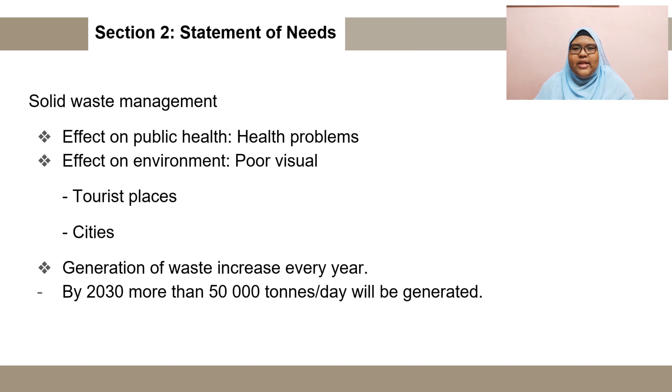The Shared Prosperity Vision 2030, National Solid Waste Management Policy 2016, 12th Malaysia Plan, Sustainable Development Agreement, and Solid Waste and Public Cleansing Management Regulation 2016 are developed and applied in Malaysia to reduce solid waste generation and improve waste management. Pahang State Structure Plan 2050 is applied in Pahang State to improve the State Structure Plan 2007, which is to upgrade the waste management sites with modern treatment and recycling facilities, and open dumping sites will be replaced with sanitary landfill and incineration facilities.

The location chosen is Tioman Island, which is known for its fishery and tourism industry. The local population totals up to 4,000 residents, with more than half working in the fishery industry. The industry is one of the main contributors to solid waste generated on the island. Tioman Island also receives a huge amount of tourists from local and various countries. According to Majlis Daerah Rompin and Tioman Development Authority, the current average of garbage generated is between 6 to 10 tons per day. During the peak tourist seasons, the solid waste generated will increase up to 14 tons per day.

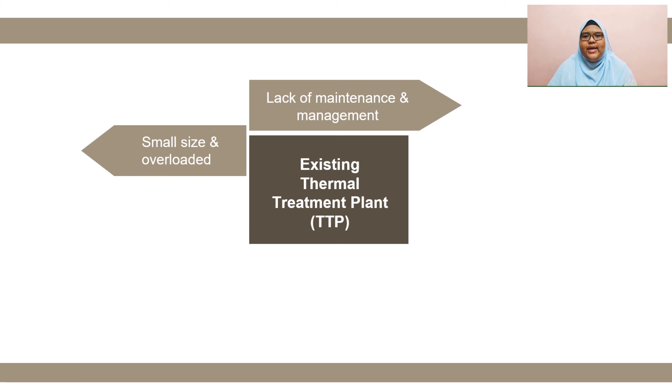A high influx of tourists has contributed a huge amount of solid waste generated on the island, oceans, and beaches nearby. The newly proposed thermal treatment plant TTP is to replace the existing TTP in Kampung Tekek. The existing TTP has been overloaded due to its small size with lack of maintenance and management, which has caused the TTP to break down and affect the treatment. The small size is not enough as it can only process a maximum of 6 tons, and a barge system has been used to transport waste to the mainland of Mersing for processing, which may cause pollution in the ocean. The waste in the existing TTP is not segregated and ashes are dumped on nearby land, which causes bad odor to be produced.

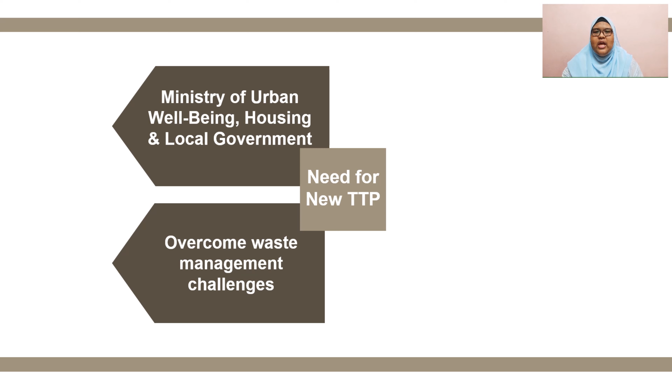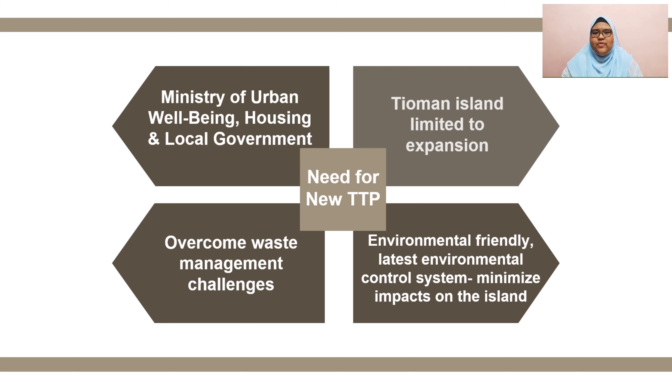The need for a solid waste thermal treatment plant is mentioned by the Ministry of Urban Wellbeing, Housing and Local Government to overcome the waste management challenges. A new TTP with higher capacity, environmentally friendly and with the latest environmental control system is the most ideal to build due to Tioman Island's condition being limited to expansion, and to minimize the impacts on the island.

The proposed TTP project uses autogenous combustion technology which applies the double counter flow process. It includes a rotary kiln system, air injection system, waste reception, waste separation facilities, gas cooling facilities, air pollution control, and wastewater system. The main processes in the TTP are solid waste receiving and handling, combustion process, and flue gas treatment.

After receiving the waste, it will undergo pre-sorting and segregation to separate the recyclable materials from the waste stream. The waste will go to a shredder to reduce the size. The magnetic separator separates the combustible and non-combustible waste before entering the combustion chambers. The rotary kiln has a proprietary air injection system to induce combustion air in the counter flow. The waste will be reduced into ash. The secondary chamber destroys toxic chemicals. The flue gas will be subjected to a cooler, then to the air pollution control system. It includes cyclones, a neutralization reactor, and a baghouse filter.

The proposed ACT technology helps to treat solid waste with high moisture contents and lower calorific value and get rid of the issue with solid waste of high moisture content and organic matters.

I am Lam from Group 1. I am given the opportunity to present the project description.

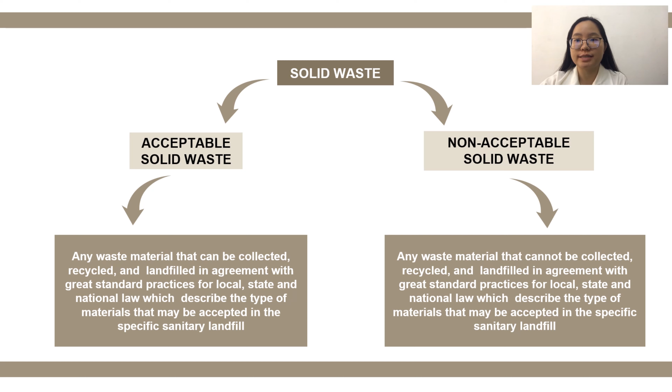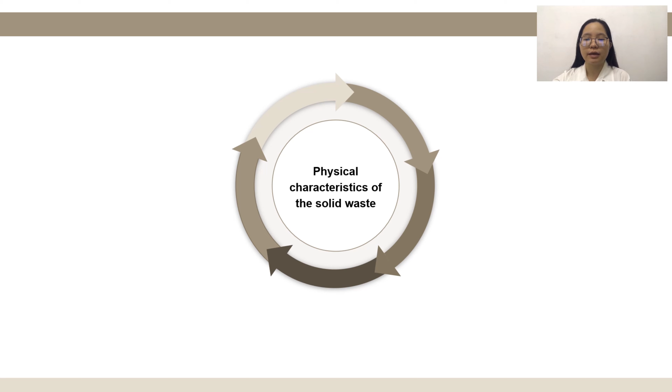Solid waste can be classified into acceptable solid waste and non-acceptable solid waste. Physical characteristics of the solid waste are significant for the selection and operation of equipment, accurate analysis, and design of disposal facilities. For example, density, moisture content, size distribution of solid waste, hydraulic conductivity, and field capacity.

The main plant process components are starting from the waste reception unit. It's part of a preparatory section comprising the waste unloading bay, waste receiving area, and feeding hopper. The waste separation facilities are used to separate the waste into two different groups, which are combustible and incombustible waste material. A sorting conveyor will be used to transfer the raw waste from the feeding hopper into the trommel.

Besides, a trommel is defined as a rotating cylindrical perforated drum and is used to segregate the waste depending on their size and remove incombustible and recyclable materials. The waste will pass through a magnetic separator after the shredder to remove all ferrous material from the final discharge conveyor. Waste is moved within the plant by a network of interconnected conveyors using segregation and separation processes.

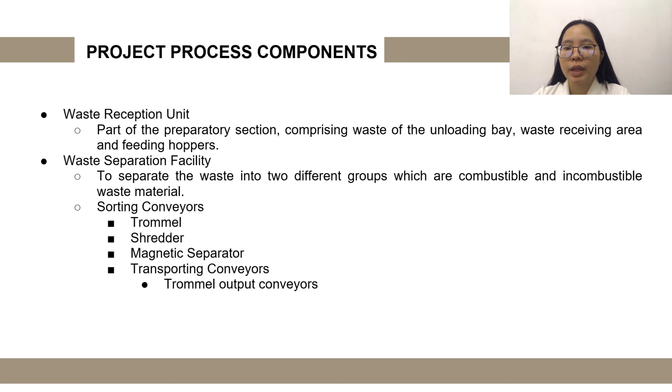The trommel output conveyor is used to transport waste coming out from the end of the trommel into the shredder. Large size waste is unable to pass through the holes in the trommel. In the trommel discharge conveyor, the solid waste will fall through the trommel via a tube below the trommel. The waste will segregate as it moves along the conveyor.

Then, the trommel output conveyor is used to transport waste coming out from the end of the trommel into the shredder. The final discharge conveyor is used to transport the shredded waste from the main feeding line to the ACT system. Thermal treatment facilities are the main component of the TTP. The system will optimize combustion and minimize emissions from the rotary kiln.

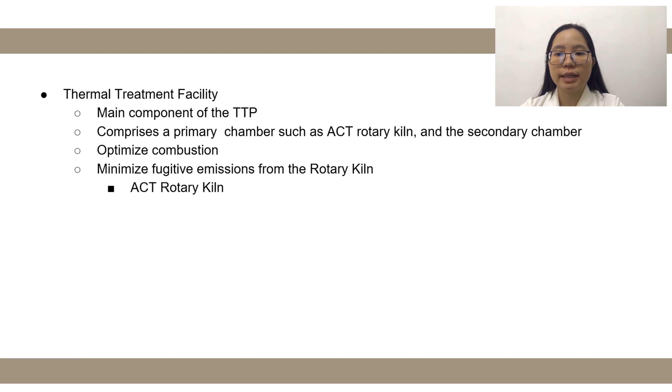The ACT rotary kiln is a cylinder consisting of two stationary heads, which are the intake and discharge heads. It's used to burn solid waste with high moisture content. The mixture of the gas generated in the rotary kiln will enter the secondary chamber at the bottom via a connecting duct. Secondary air will be introduced into the chamber to provide oxygen for the combustion.

Gas cooling facilities apply to avoid sedimentation of dust in the tube. It uses ambient air as the cooling medium instead of water, and no wastewater will be produced. Moreover, the pollutants in the flue gas must be removed by using a series of air pollution treatment and control units such as a cyclone, neutralization reactor, and baghouse filter.

The pencil-type cyclone is a centrifugal separator that uses centrifugal force to separate and remove particles in the flue gas. Acid gas removal is by a semi-dry neutralization reactor that is used to remove acid gases such as sulfur dioxide and HCl in the flue gas. The chemical reactions take place in the reactor as below.

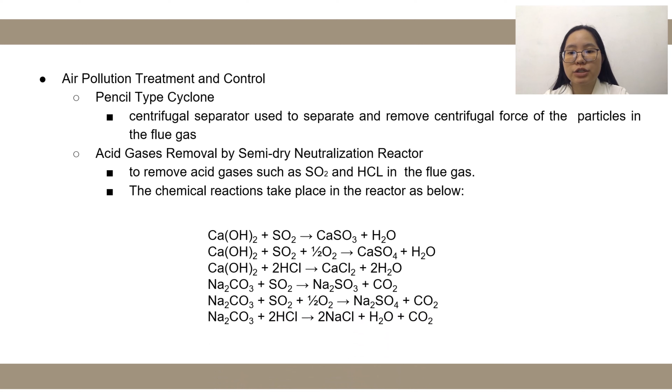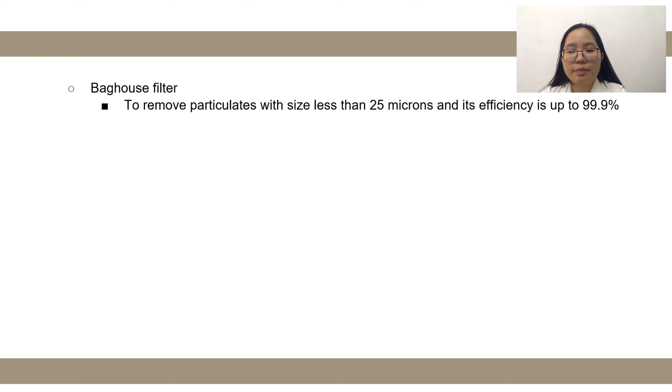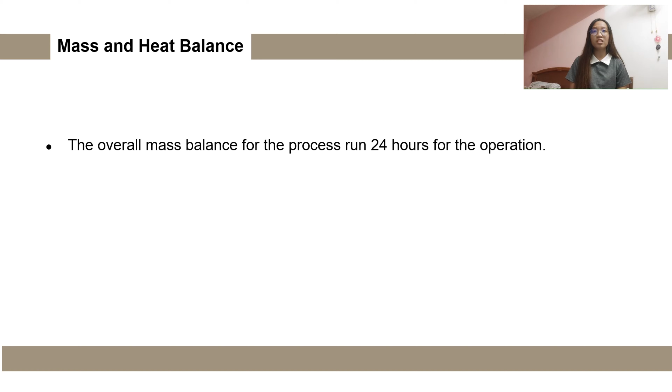The mass and heat balance generated by the thermal treatment plant is predicted. The overall mass balance is for the process running 24 hours of operation. The most recyclable and non-combustible waste will be removed to reduce the quantity and give more space to other waste. It is estimated 50 kg is removed. 1,383 kg per hour of waste will be treated in the rotary kiln.

Heat losses of latent heat and radiation are 22.4% and 5.2% of the total heat respectively. The anticipated amount of heat loss because of the removal of ash is 2,882 kilocalories per hour. Two types of ash are produced in the combustion process, which are bottom ash and fly ash.

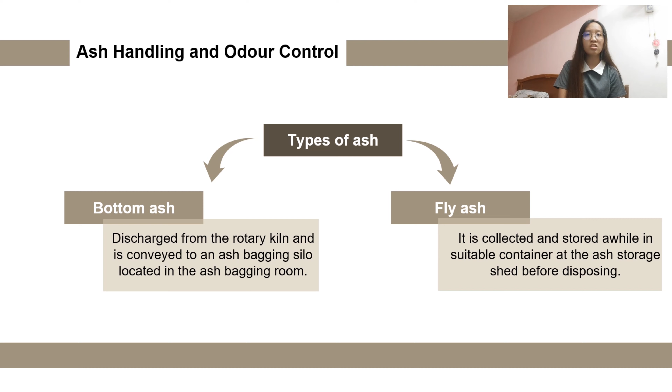Negative pressure is created by a mechanical ventilation system installed in the enclosed building to prevent odor from escaping to the outside environment. The utility consumptions include the water demand, energy requirements, and startup fuel. The water will be stored in the raw water tank with an approximate usable capacity of 17.1 cubic meters per day.

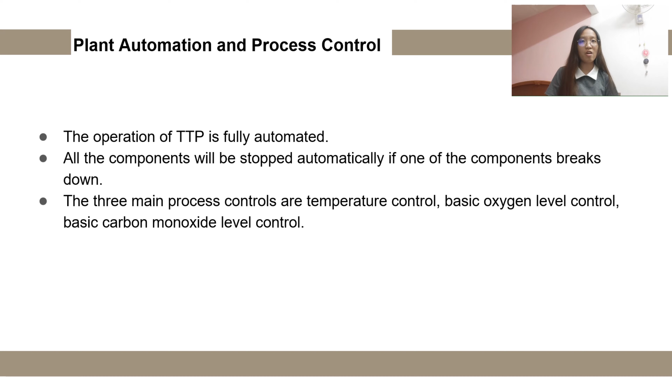Operation of TTP is fully automated. All the components will be stopped automatically if one of the components breaks down. The three main process controls are temperature control, basic oxygen level control, and basic carbon monoxide level control. The online monitoring will look for the parameters, namely temperature set point, oxygen level, and flue gas pollutants level.

Abnormal operation is a situation where the plant fails to function as usual. It may lead to emergency shutdown of the plant. The time required for the complete shutdown is estimated at not more than 1 hour. For example, failure occurs in the waste preparation system, power during operation, ash handling, ID fans, primary fans and secondary fans, neutralization reactor, air pollution control system, and baghouse.

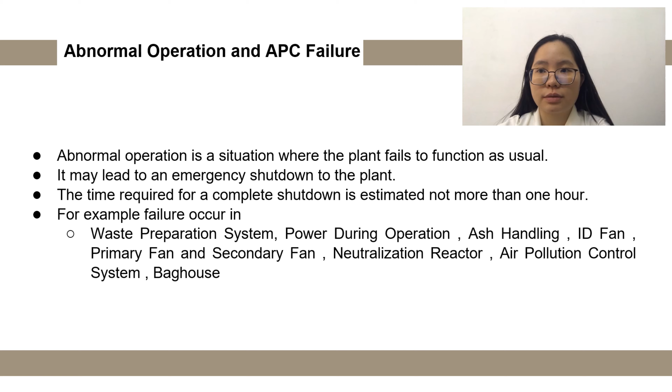My name is Matilda and I will be discussing Section 4 on project options with my groupmate Po Ai. This chapter summarizes the project options that were considered, that are the options for waste treatment and disposal, the thermal treatment process technology options, and the options for the siting of the facility that is proposed.

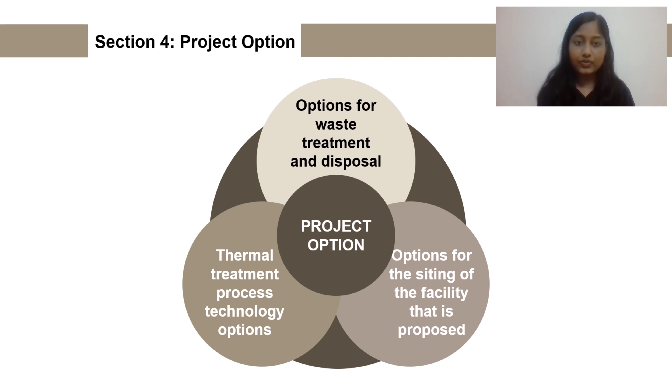There are two key objectives identified for this project, which are to establish a comprehensive, integrated, cost-effective, sustainable, and socially acceptable solid waste management (SWM), and to implement SWM based on the waste management hierarchy that gives priority to waste reduction through 3R, intermediate treatment and final disposal.

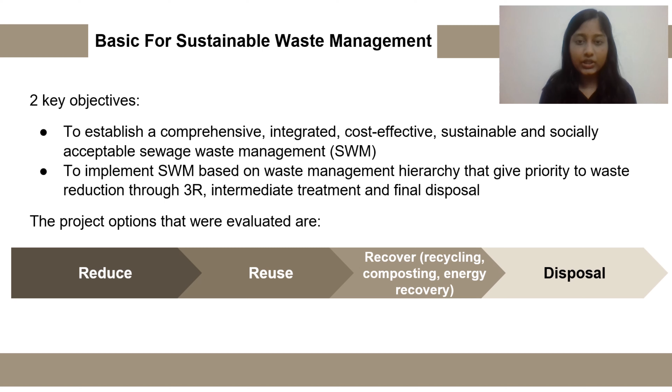Next, I will discuss the selection criteria of a suitable solid waste treatment plant. The selection of a suitable waste treatment and disposal method has to be considered within the context of local conditions. In considering the most suitable approach to effective solid waste management, the principle of waste minimization will always be a priority. The evaluations take into consideration the geographical and climate restrictions, land availability, environmental impact, financial and technical feasibility, public education and perception, type, quantity and quality of waste, product utilization, legal constraints, as well as compliance with policies, legislation, and national plans.

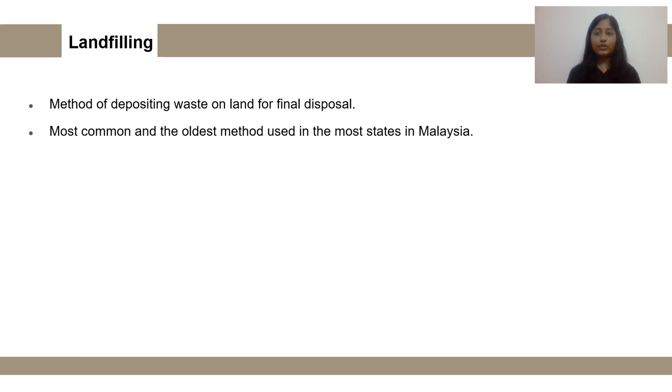The first treatment method discussed is landfilling, which is a method of depositing waste on land for final disposal. It is the most common and the oldest method used in most states in Malaysia. However, landfilling requires a large area for its development. In Pulau Tioman, there is a land constraint as it is an island.

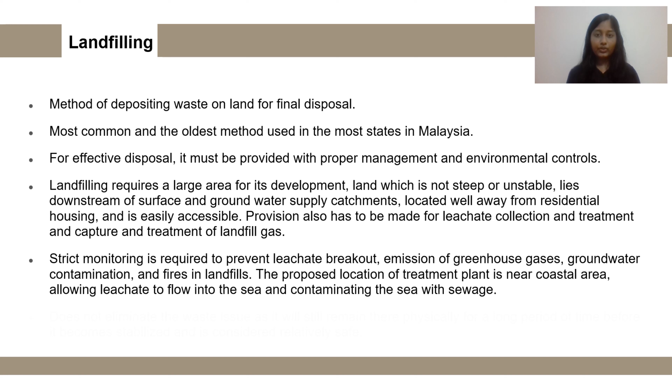Besides that, the proposed location of the treatment plant is near the coastal area, allowing leachate to flow into the sea and contaminating the sea with sewage. This will negatively impact the people in the area, as the sea is an important source of livelihood for them. It does not eliminate the waste issue, as it will remain there physically for a long period of time before it becomes stabilized and considered relatively safe.

Composting involves the biological treatment of waste through biodegradation of the organic fraction of the waste by an aerobic process using microorganisms. In the case of Pulau Tioman, the organic content of the waste is high. Again, land is constrained in this case since it will be located on an island, as 1 square meter of land is required for each ton of compost being created.

The long time taken for the composting process to be concluded may affect the running capacity of the plant, as it will not be able to accommodate the increase in waste produced due to the booming tourism activities on the island. It will likely be a more expensive alternative compared to sanitary landfill.

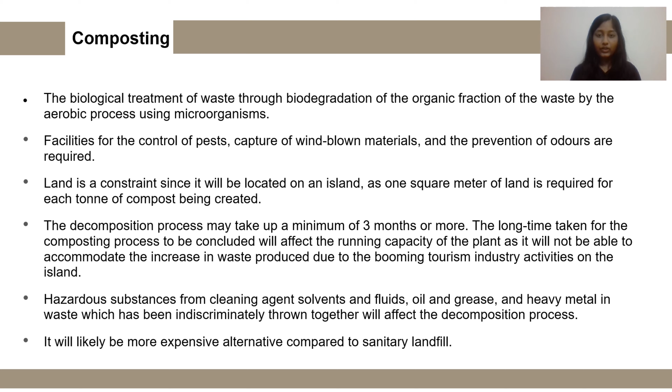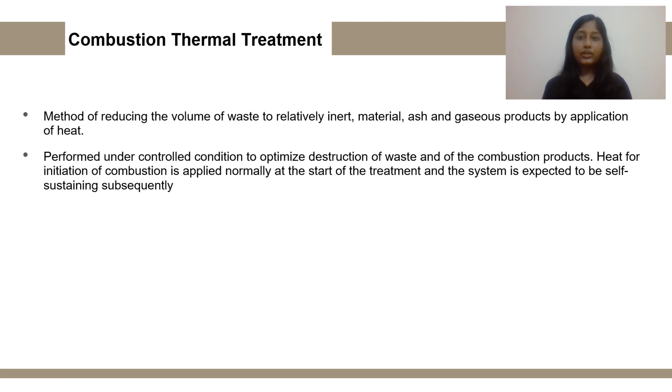The last treatment is thermal treatment, often referred to as combustion, which is a method of reducing the volume of waste to relatively inert material ash and gaseous products by application of heat. Thermal treatment of waste is an efficient method to reduce the feed volume by 85 to 90%. This treatment method is most appropriate where land is scarce and expensive and where environmental conservation of natural resources is important. It has been widely used in many countries.

However, thermal treatment requires high initial capital investment and skilled staff to maintain the system, besides having a relatively high operation and maintenance cost. Thermal treatment was opted as the most suitable waste management technology. There were several concerns taken into account when choosing this option, which brought along its advantages. It is discussed in the following table.

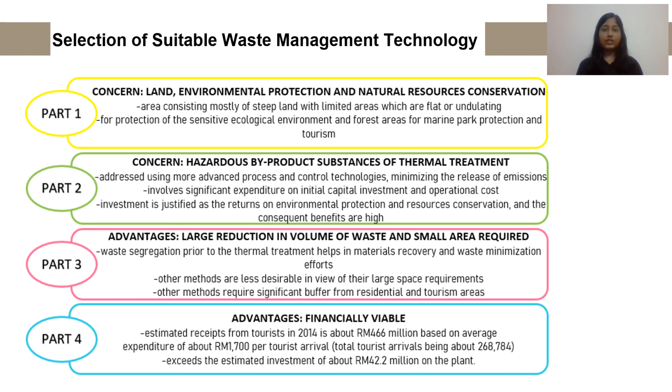Hi, I am Po Ai, and I will talk about the thermal treatment plant options. The existing thermal treatment plants operate with traditional fuel, which is limited in resources and might cause pollution. The TTP in Pulau Tioman is small scale, and the discussion below will present the advanced technology options employed to produce greener energy for our environment. First, gasification is one of the technology options.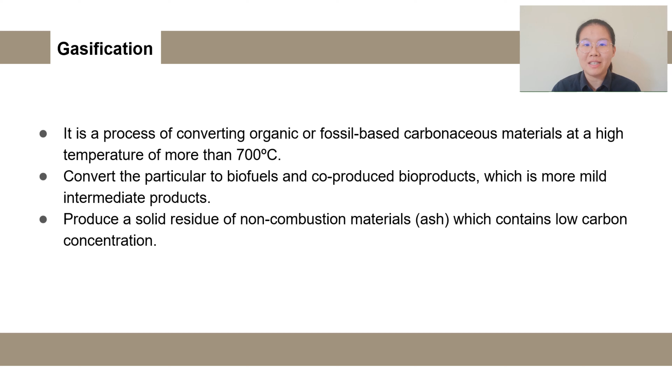Gasification is a process of converting organic or fossil-based carbonaceous materials at a high temperature. Gasification can convert the particulate to biofuels and co-produced bioproducts, which are small amounts of intermediate products. Besides, it will produce solid residue of non-combustion materials. There are two types of bed used in gasification.

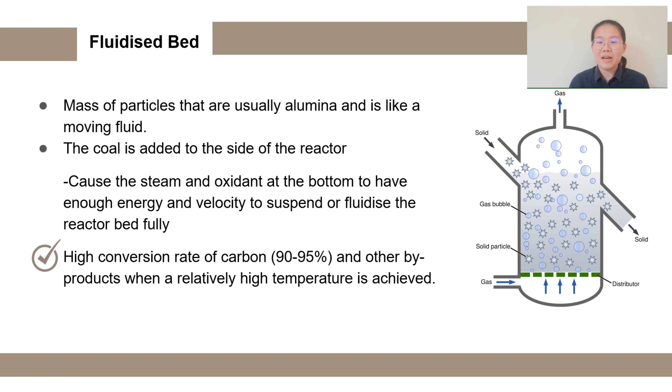Fluidized bed is a mass of particles where the coal is added to the side of the reactor and causes the steam and oxidant at the bottom to have enough energy to suspend it and fluidize the reactor bed fully. The benefit of using a fluidized bed is the high conversion rate of carbon and other byproducts when a relatively high temperature is achieved.

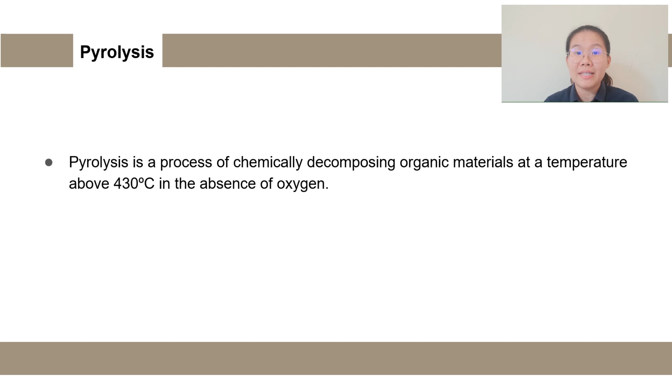The second technology option that I'm introducing is pyrolysis. Pyrolysis is a process of chemically decomposing organic materials at a temperature above 430 degrees Celsius in the absence of oxygen. The main advantage of the pyrolysis process is that products can be recovered beneficially to plant energy.

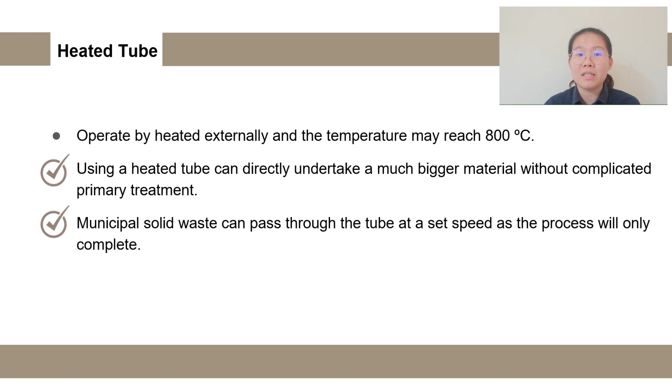Heated tube is a process of pyrolysis which operates by being heated externally, and the temperature may reach 800 degrees Celsius. Therefore, using a heated tube can directly undertake much bigger material without complicated primary treatment, and the municipal solid waste can pass through the tube at a set speed as the process is complete.

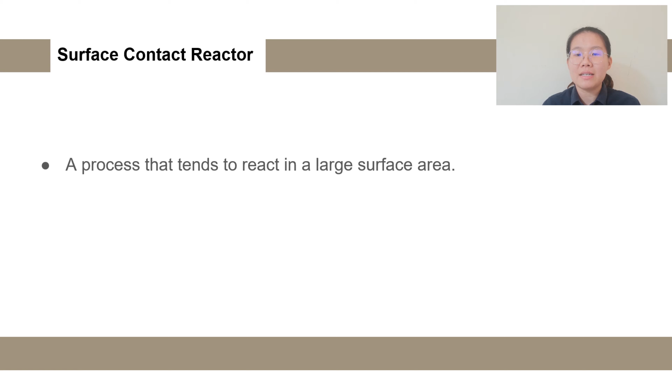Next, surface contact reactor is a process that tends to react in a large surface area. The benefit of a surface contact reactor is that it can maximize the rate of pyrolysis by increasing the surface area. The rotary kiln creates a swirling movement of particles to undergo pyrolysis at a temperature of 430 degrees Celsius. The main principle of the rotary kiln is heating the rotating drums inside the furnace or heat shroud. The internal environment is well controlled due to the sealed environment.

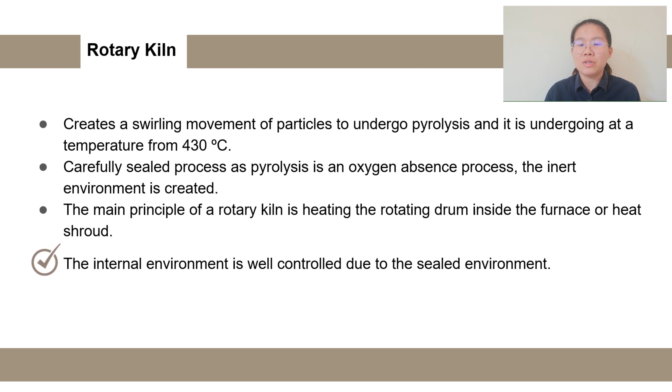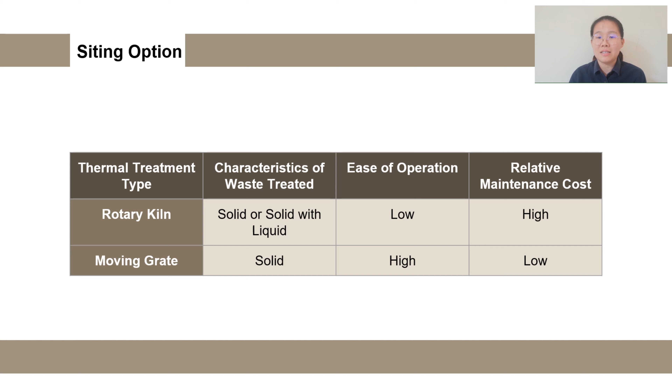For siting options, the recommended TTP will be either rotary kiln or grate type thermal treatment due to several factors of waste, ease of operation, and maintenance costs. For solid waste management, environment and conservation are an important aspect to evaluate the suitability of the project. A thermal treatment plant is a solution for landfilling.

The last option proposed is the no project option, which would mean that the current method of open dumping will continue. This will cause odor to emanate in the surrounding area. The current site will be open to scavengers and pests and result in visual amenity loss, as the site is visible to travelers along the main road leading to Pulau Tioman.

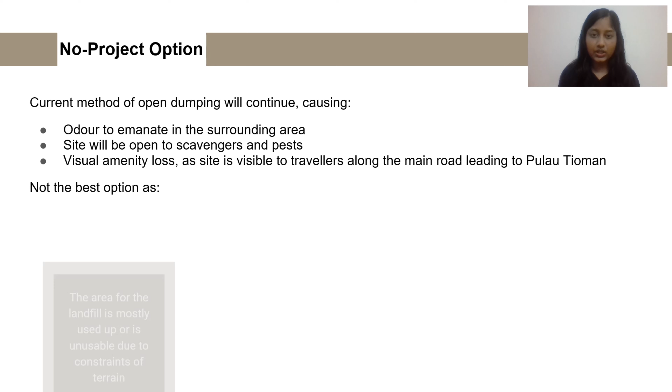This is not the best option, as the area for the landfill is mostly used up or is unusable due to the constraints of terrain, resulting in new areas which need to be acquired to extend the landfill. It will likely involve acquisition of forest and swampland, which are sensitive and of high conservation value. Environmental protection and natural resources conservation are critical elements for protection of Pulau Tioman for tourism and the Center for Marine Conservation.

Hi, my name is Ho Chia Yen and I'm responsible for explaining Chapter 5, Existing Environment. For the assessment of environmental impacts, the environmental features were studied in terms of physical, biological, and socio-economic elements. Information was obtained during field survey, secondary data sources, as well as from the site visits.

The terrain of the island is quite steep, rising from 75 meters to 1040 meters above mean sea level, resulting in short and steep river profiles. In the hinterlands, there are hills and mountains covered by flora of tropical forests, namely Gunung Kajang, Gunung Rombin Tioman, Gunung Seperak, and Bukit Nenek Semukut.

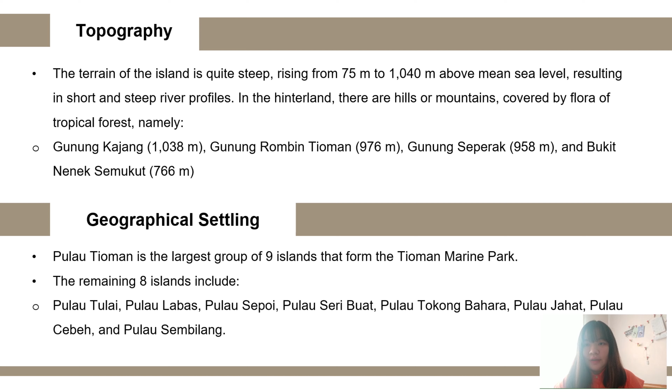For geographical setting, Pulau Tioman is the largest of a group of 9 islands that form the Tioman Marine Park. In addition to Pulau Tioman, the remaining 8 islands include Pulau Tulai, Pulau Labas, Pulau Sepoi, Pulau Seri Buat, Pulau Tokong Bahara, Pulau Cebeh, and last but not least, Pulau Sembilang. The ecology in Pulau Tioman consists of flora and fauna such as reptiles and amphibians, mammals, birds, coral, marine organisms, and other floral species.

Air quality monitoring was done at 4 locations, namely 1 at the project site and 3 at the nearest residential area. The exercise was carried out on 3rd to 6th September, first round under normal operation, and 7 to 11 October, second round under the worst condition. Monitoring for HCl was done on 14th of November. The air quality results are as follows.

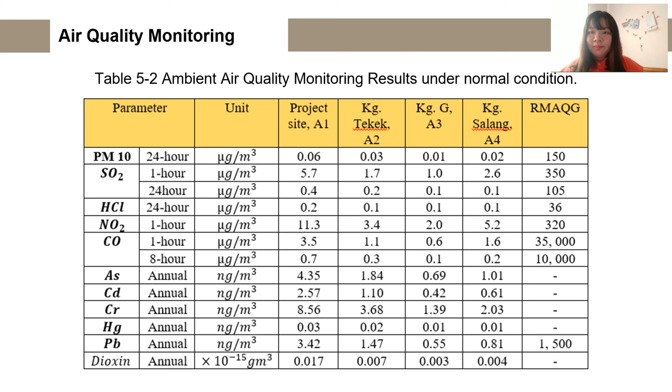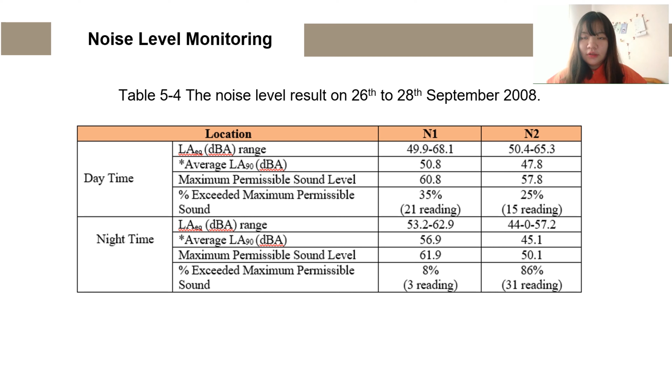It can be concluded that, under the worst condition, the uncontrolled release of air pollutants within 1 hour will cause severe air pollution. Environmental noise level monitoring was conducted at 2 stations on 26 to 28 September and 7 to 9 October. 2 locations, namely N1 and N2, were chosen. The noise level results for first round and second round monitoring were tabulated in tables below.

The results show that the daytime noise level at station N1 and N2 has exceeded the maximum permissible limits during the first monitoring round at daytime, except for N1 in the second monitoring round. The higher noise level is expected to be contributed by trucks travelling within the project site, transporting waste from Kampung Tekek and nearby tourism area such as Marine Park Centre.

The nighttime noise level for both stations exceeded the permissible level limits, except for N1 during second monitoring round. Major noise sources observed were vehicle movement, surrounding noise, and also resident activities.

The population of Pulau Tioman is 3,314 in the year 2008. The population of Pulau Tioman has increased steadily at an average of 4.2% per annum from 1991 to the year 2000. In the population census of the year 2008, out of the 3,049 Malaysian citizens residing in Pulau Tioman, 92.1% of them are Malay, 6.8% are Chinese, followed by 0.3% Indian, and the remaining 0.8% are

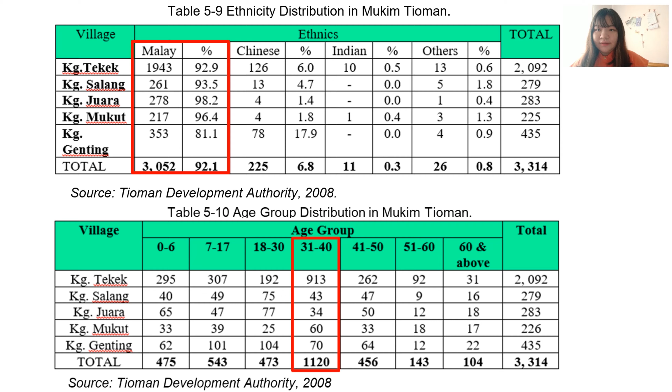other ethnicity. Based on the recent survey, most of the population have either a secondary, 34%, or primary education, 31%. However, about 24% of the population never attended school, and only 2% of the total population further study until tertiary level. There is also a total of 4% of the population with unknown education levels.

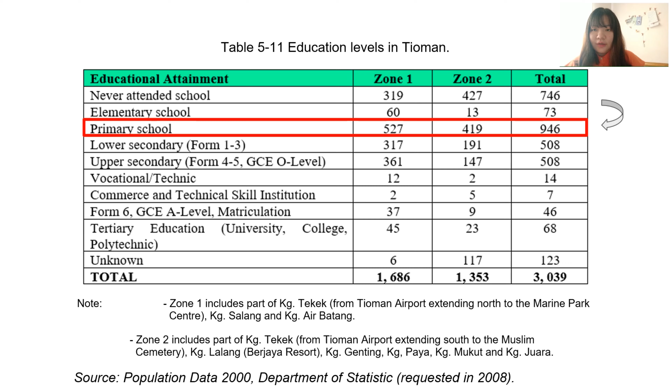The major economic activity in Pulau Tioman is tourism. A current socio-economic survey also indicates that about 52% of the population do not have any alternative income-generating activities. The rest, 48%, are mainly involved in farming, tourism-related activities, and also fishing.

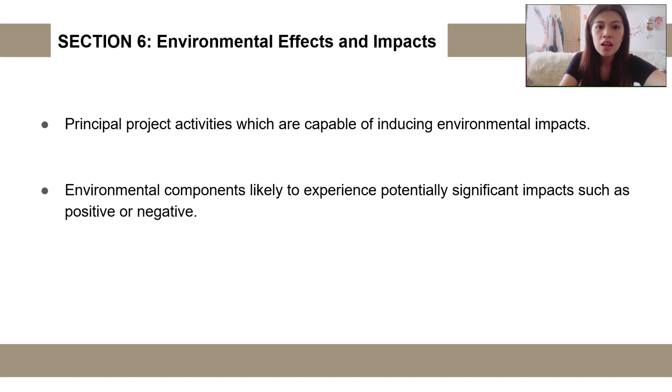Principal project activities which are capable of inducing environmental impacts, whether adverse or beneficial. The anticipated effect of the interaction between the project activities and the environment have been described. Environmental components likely to experience potentially significant impact, such as positive or negative. The implementation and the operation of the proposed TTP are discussed in this chapter. The TTP activities and their impacts on the environment will be viewed in an integrated manner in terms of magnitude, prevalence, duration, and frequency of occurrence.

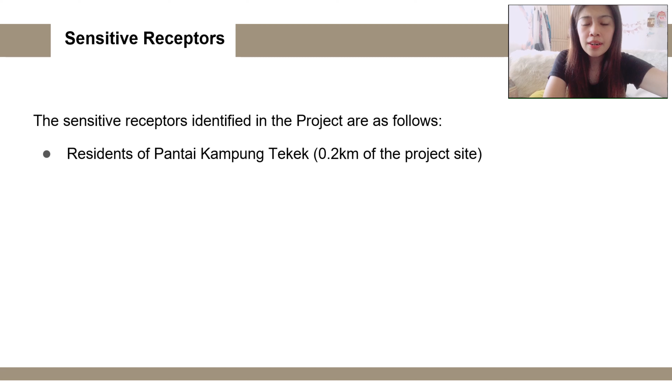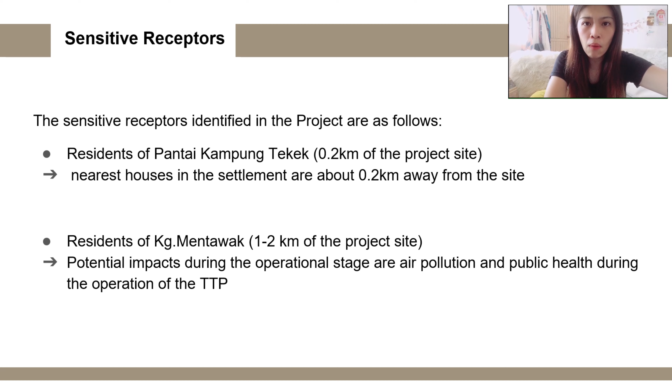The sensitive receptors identified in the project are as follows. The first one, residents of Pandai Kampung Tekek, 0.2 km of the project site. The nearest houses in the settlement are about 0.2 km away from the site. The second is the residents of Kampung Mentawak, 1 to 2 km of the project site.

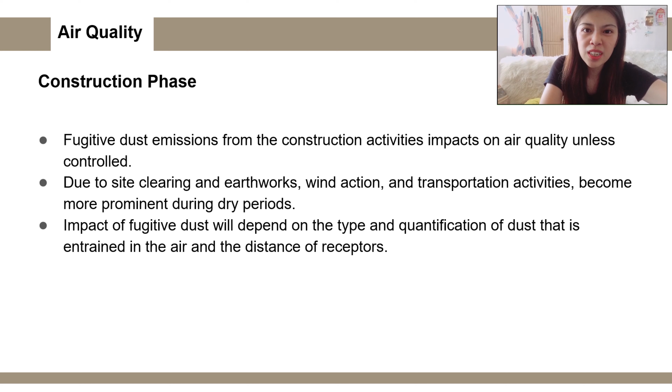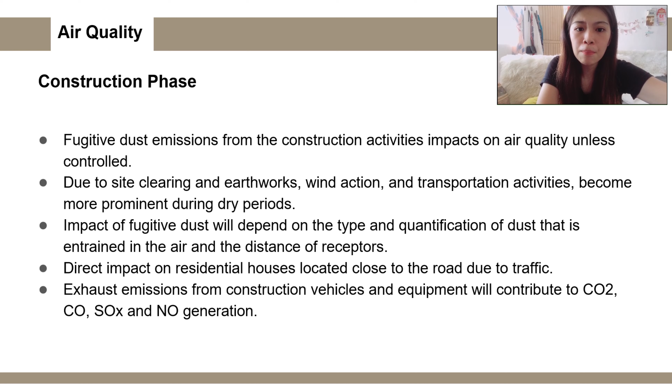Fugitive dust emission from the construction activities has the potential to result in localized impacts on air quality unless controlled. Example activities where fugitive dust may be generated are site clearing and earthwork when soil is exposed, wind blowing across exposed soil surface, the movement of heavy vehicles, concrete mixing at site, and building construction activities. Fugitive dust generation due to site clearing and earthwork, wind action and transportation activities becomes more prominent during dry periods when the soil or road surface is dry.

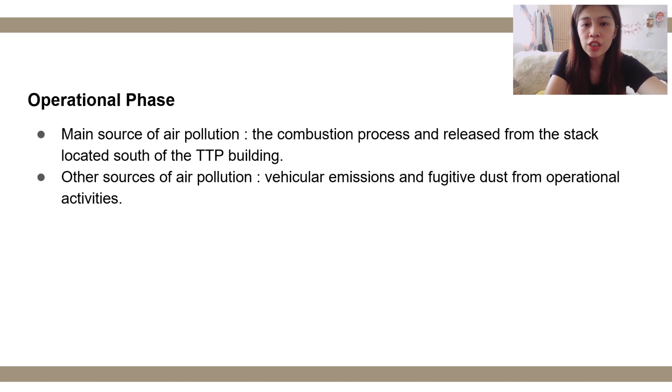However, the number of vehicles and equipment anticipated to be used for the project construction is minimal, and therefore the potential for excessive emission that can become potentially hazardous is not expected to be significant. The main source of air pollution will be flue gas generated by the combustion process, which will be released from the stack located south of the TTP building. Other sources of air pollution are vehicular emission and fugitive dust from operational activities. Thermal treatment of solid waste is expected to generate the following air pollutants.

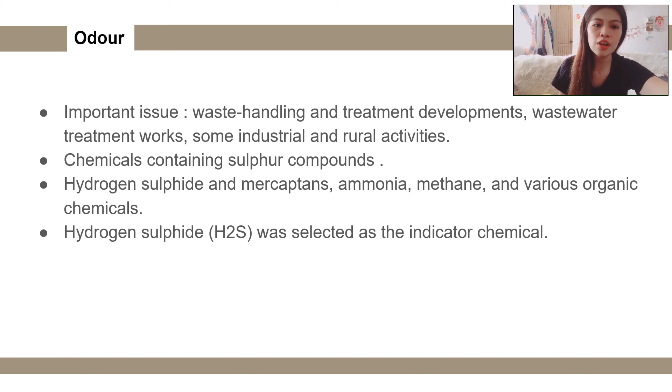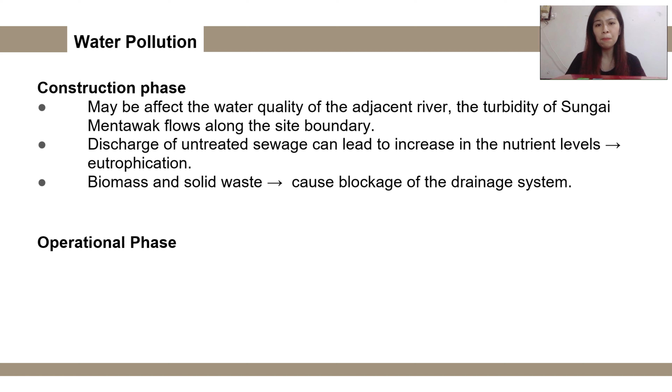Impacts during the construction phase may affect the water quality of the adjacent river, Sungai Mentawak, which flows along the site boundary. The main water quality impacts during the operational phase of the TTP will arise from the effluent discharge of the wastewater treatment plant. Activities during the construction stage include site clearing and earthwork, which result in potential soil erosion and sedimentation problems. Erosion is likely to take place when soil is left bare and exposed to rainfall and wind action. During rainy days, runoff from the site will carry sediments on the ground surface into Sungai Mentawak.

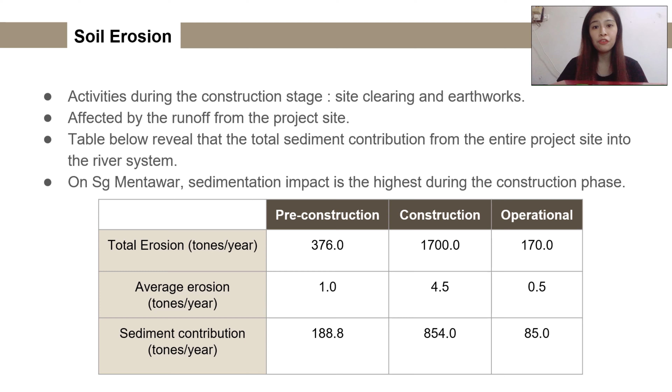Table below shows that the total sediment contribution from the entire project site into the river system was predicted for the 3 project phases. Impacts from construction activities are temporary in duration and can generally be controlled to within acceptable levels. The operation and movement of these machineries and vehicles will be a source of noise.

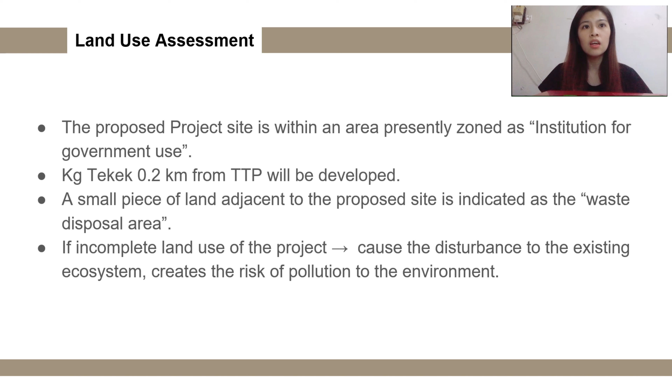Hi, I'm Eileen. Today I'm going to present mitigation measures.

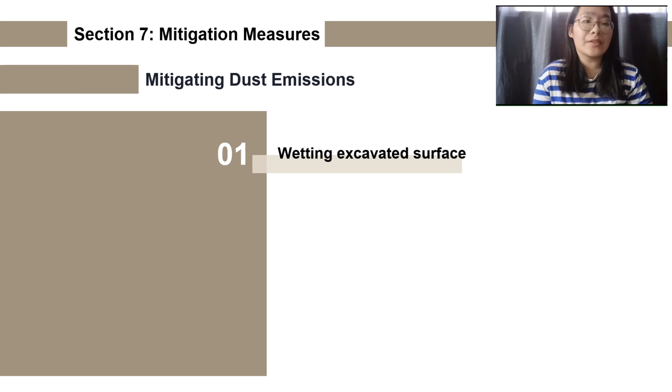Dust emissions from soil piles or any other material during earthwork, excavations and transportation should be controlled by wetting the surface, using temporary tools, windbreaks and covered truck doors. Temporary noise pollution caused by construction should be properly controlled by maintenance of equipment and vehicles, as well as tuning of engines and mufflers. A qualified engineer and supervisor should be assigned to complete the project in the shortest possible time. The construction should also be limited to daytime.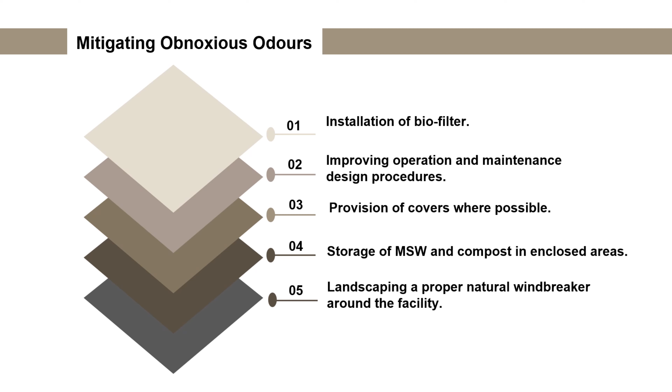The odors emitted by TTP may be a potential nuisance to the public. However, by providing negative internal pressure and installation of the biological filter, it can reduce or prevent the pestilent smell. Normal housekeeping, improved operations and maintenance design procedures further reduce or prevent odor emissions. When odor emissions may cause complaints, providing odor covers to the odor source should be considered, especially for the compost storage and leachate collection tanks. Proper landscaping around the facility can be used as a natural windbreaker to minimize potential odor spread.

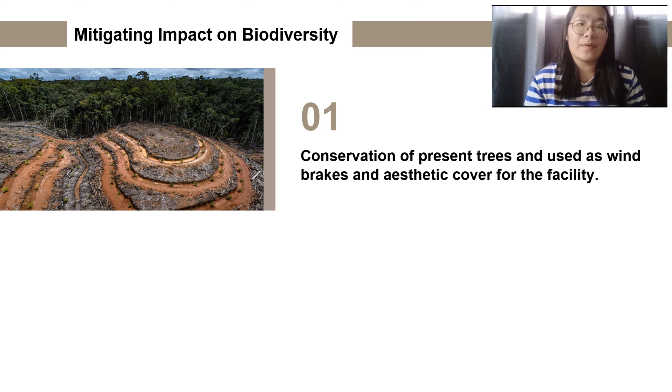Suggested mitigation measures to minimize or eliminate the impacts on biodiversity of the proposed site include conservation of present trees and use as windbreaks and aesthetic cover for the facility, and introducing vegetation. Proper design of operations of TTP, provision of adequate separation of waste, monitoring of compost quality based on MOE standards, and training farmers for the proper handling and use of compost at the agricultural site are the measures suggested for mitigating impacts on receiving soil.

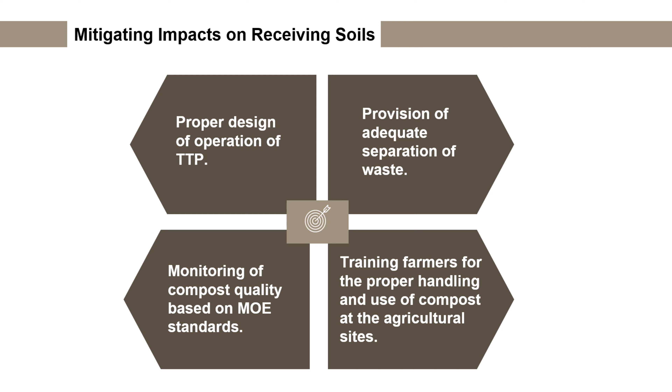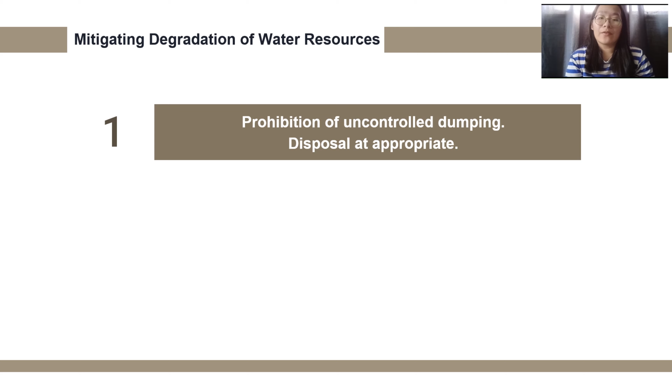Suggested mitigation measures for degradation of water resources include the prohibition of uncontrolled dumping and education of workers on environmental protection. In order to reduce potential impacts, the following strategies should be adopted. First, increase the waste collection fleet. Second, a tipping floor to handle a 2-day storage capacity to prevent MSW overflow. Third, install a biofilter to ensure that maintenance operations can be done without upsetting the whole odor control system.

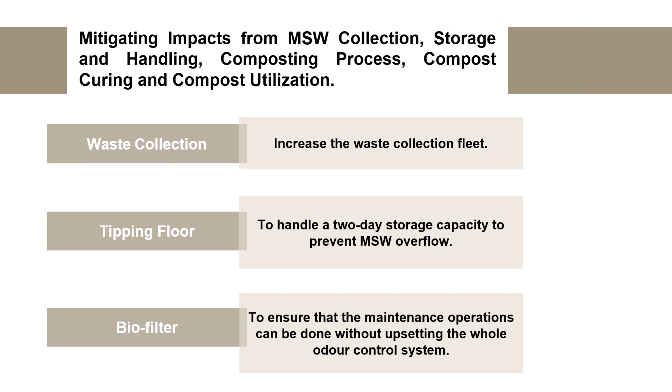To avoid the possible visual impact from the presence of TTP to the local community, especially the households near the facility, the following steps should be performed. First, maintain the cleanliness of the treatment facility. Second, plant suitable trees such as juniper, grass, and flowers. And thirdly, fence and screen the site with suitable trees to obstruct the plant's components from onlookers and area inhabitants.

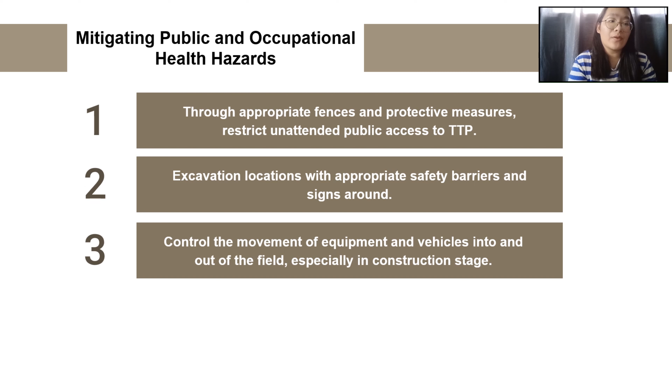The possibility of impact on public and occupational safety may be suppressed by the following mitigation measures. First, through appropriate fences and protective measures, restrict unauthorized public access to TTP. Second, surround excavation locations with appropriate safety barriers and signs. Third, control the movement of equipment and vehicles into and out of the field, especially in the construction stage. And lastly, pay attention to the safety education and training of system personnel, and strengthen compliance with safety procedures.

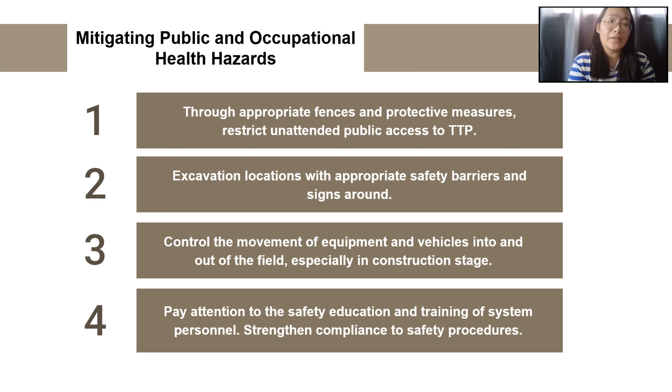Hello, I'm Divya from Group 1. I'm invited as Environmental Management Framework Officer for this proposed TTP project. The management framework covers both the construction and operational phases of the project. The framework provides the basic mechanism of the organizational setup and the environmental monitoring system of the project.

Organization is very important to ensure the effectiveness of the management implementation on site. In this organization, the Ministry of Housing and Local Government, contractor, technology provider, and the consultant are the main parties. Moving on to the reporting system, the environmental officer brings up and resolves environmental issues that involve multiple parties in project meetings.

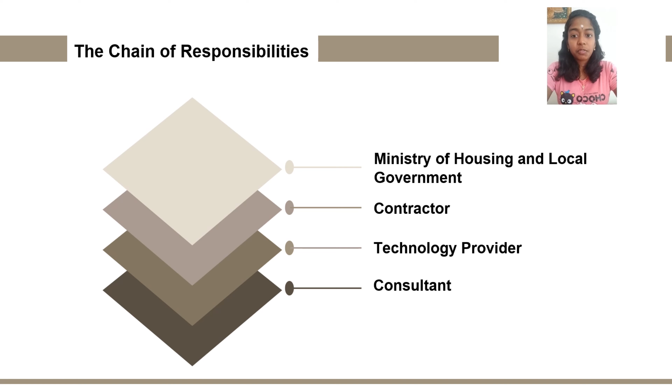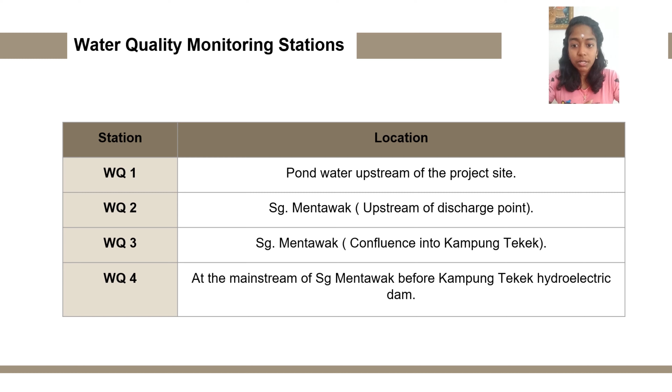The EMP requires environmental sampling to be carried out. The air quality will be monitored regarding air pollutants emitted during the construction phase by total suspended particles. The water quality is measured at the 4 stations along Sungai Mentawak and Kampung Tekek every month with parameters such as pH, BOD, COD, dissolved oxygen, and so on. Monitoring will be established at the site boundary, and the noise is expected to be generated from the lorries and bulldozers. The summary of 3 elements of environmental monitoring is tabulated in the report in Table 8.3, with data collected during monitoring accredited with Skim Akreditasi Malaysia.

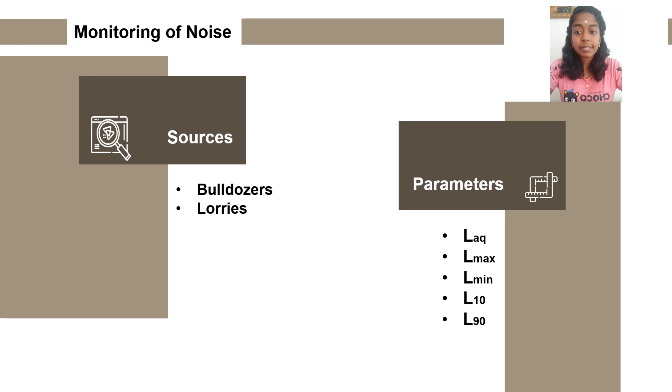As a conclusion, TTP is equipped with an air pollution control system. A controlled emergency shutdown system is also equipped to control the plant during abnormal operations. The hazard index of all toxic air pollutants is calculated. Losses during both construction and operation phases will be minimal, and mitigation measures will be implemented as planned.